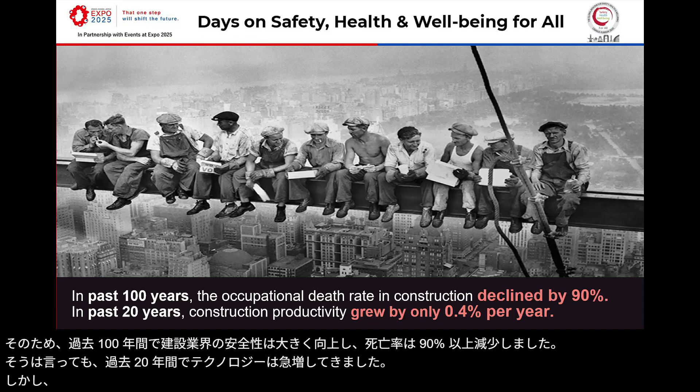Thank you, Ada. For those of you who are not familiar with Lenovo PCCW Solutions, we are the system integrator in this region, supporting many governments and enterprises in digital transformation. Here is the famous photo shot back in the 1930s, when the Rockefeller Center was built. In the past 100 years, there has been big improvement in safety, with the death rate of the construction industry reduced by more than 90%. Technology has been proliferating in the last 20 years. However, productivity only improved marginally, by 0.4%. So is technology a hype, or are we really in an era of change?

Here is the reality check. Compared to other industries, construction is behind in terms of IT spend. While the industry average is 4 to 6% of revenue going into IT, construction barely has 1%. Many of the works are still manual, 45%. In Asia Pacific, we are lagging behind our US and European counterparts. Statistically, if you compare the claims ratio, construction and engineering companies spend 3% on claims. So imagine the dollars spent. If you can improve productivity and the fatality and incident rate, that will reduce the outages of the industry and make it work much more effectively. So how can AI help? It helps with automation, project oversight, and quality oversight as well.

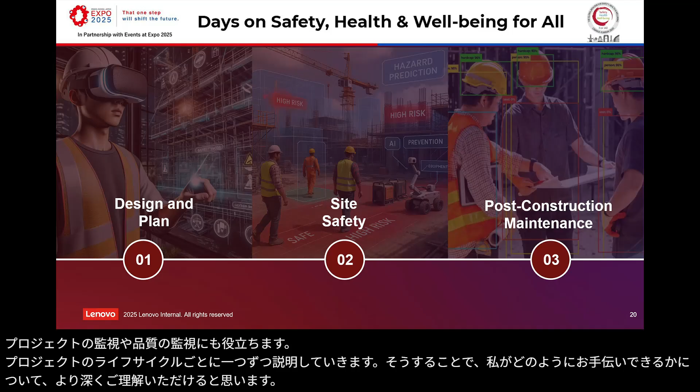So I will go one by one into the different life cycles of a project, and that will give you more perspective of how AI can help, from the design planning to the site safety and to the post-project. Construction and engineering is a very dangerous industry because it's time tight and resources tight by nature. And there are millions of parts moving around, and it's dynamic on a daily basis.

So when it comes to planning, that becomes crucial. In the past 10 years, we have had all those project management tools like P6. And nowadays with BIM and also the digital twin, we are able to do 3D modeling with resources control, supply chain, and labor resources planning as well. That helps us plan the project much more effectively and tune it according to the circumstances.

Virtual testing also comes into the picture. Prototyping is made much easier so that we can tune the design before it gets into the production stage. When it comes to training and learning, previously there were many complex contexts that didn't allow training to happen, or it was very contextual when it comes to incidents or disasters happening. Now it's all made available with VR and AR technology. With automation and robotics, many of the repetitive tasks at height, in tunnels, or in hazardous environments are all made possible today.

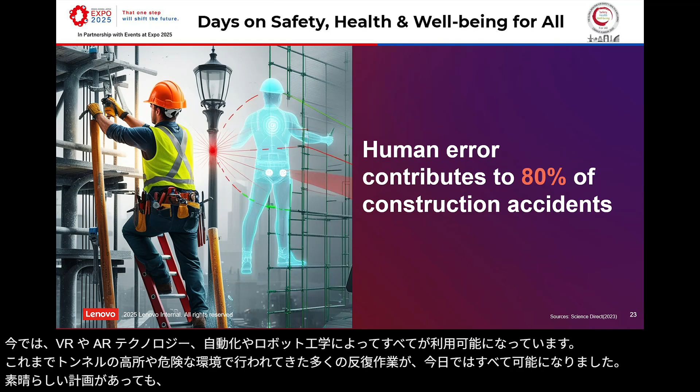So when you have an excellent plan, still, when it comes to execution, human error can cause 80% of the accidents. That is why control over the site is important. Drones nowadays allow us to do topography and landscaping checks to see where there are falling objects, flooding, water clogging, or dangerous slopes. They can also check where there are obstructions and blockages so that we can minimize the external environment harming our workers' safety.

Meanwhile, there are security measures that we have to blueprint and govern as well. When it comes to PPE control or access control, those can give you real-time monitoring, and can give you the permits and approvals only when they're deemed governed and followed through, so that you can check the security measures on site.

After construction is done and the project is executed, hardware failures, particularly unforeseen ones, cause another 30% of the incidents. So when it comes to post-project, with the help of technology, we have structural monitoring. With noise, frequency, or thermal infrared checking, we are able to tell when the hardware is near its breaking point, or we can do preventive maintenance before it gets into outages.

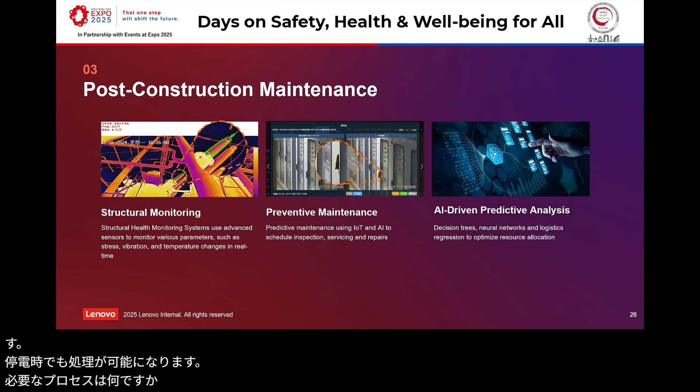So with AI, I think there's no doubt in this room that AI can help us improve the creativity and productivity of construction and production projects. However, AI is just a technology. The people around it are the most crucial because we own, are responsible for, and govern its successful implementation. And with AI technology coming much more into practice, skills also need to uptick. Data analytics, AI analytics, and operation of robotic equipment all require new skills. So even when the capital investment and internal staffing may not be ready, we have to take up the AI journey.

So you may count on some technology partners to help you in the process. We have helped power generation companies, car manufacturers, and water departments with many AI technology POCs, and some have even gone into the live stage already. So this is the major takeaway I wanted to share, and I'm sure the following speakers can give you the specific areas, context, and use cases.

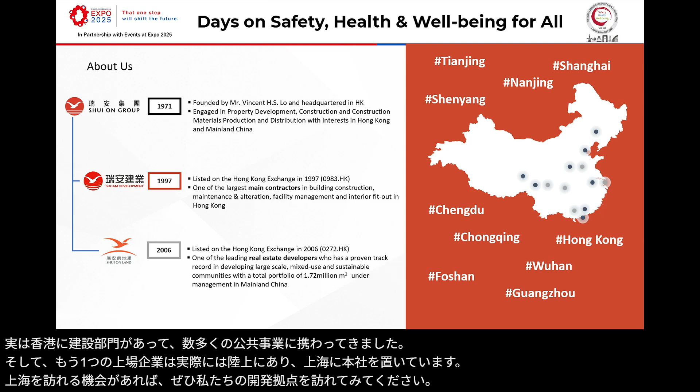Okay, so in short, I describe ourselves as a service provider, a one-stop service for buildings, from development, design and construction, interior fit-out, property management, maintenance and alteration, as well as asset management. And we also have our in-house digital solutions called Genesis.

Okay, let's get back to the sharing of today. I believe that right now the main contractors in Hong Kong are facing a lot of challenges. I think the key challenge we are facing now is the increased penalties. If there's any fatal or serious accident, you may risk immediate suspension from tendering, in particular for public works. That means a suspension for 6 months or even a year long. That means maybe billions of business opportunity will be forfeited.

The second one is stringent regulations, more stringent regulating actions against serious accidents for the contractors or those who are engaged in construction. High safety accountability. That means legal liability extends to all project levels, even professionals. Sometimes those engaged in project management may even face potential imprisonment.

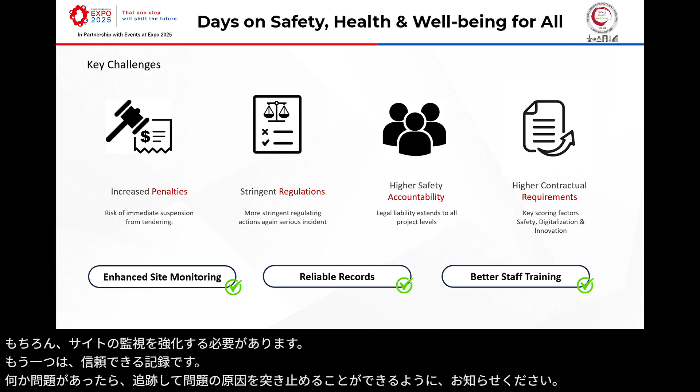So as a contractor, how can we cater to or manage these challenges? Of course, we have to enhance our site monitoring. The other thing is to have reliable records if anything goes wrong, so you can track and trace back the problem. And of course, better site staff training as well as workers training.

Right now, for any public works above 30 million contract sum, you have to use the 4S, what we call the smart site safety system. It's a kind of monitoring platform, and there are at least 9 functions, from plant and tools tracking, permit to work, AI safety monitoring, tower crane alert system, etc. Right now, I think a lot of sites are equipped with these 4S systems.

Some of the contractors will outsource it, but for ourselves, we are doing it by ourselves, from development to implementation. Of course, we are always subject to improvement and adjust all these different modules according to the project specifics.

And the other thing is that all this technology enables us to use the site camera. This is not only at the site level, but all the images can transmit to the head office. Actually, that's my office every day. If I'm in the office, I go and have a look at the major projects, and I can give instructions, or if I spot anything that is not according to the safety regulations or there's potential danger, I just send my message to the project manager on site immediately.

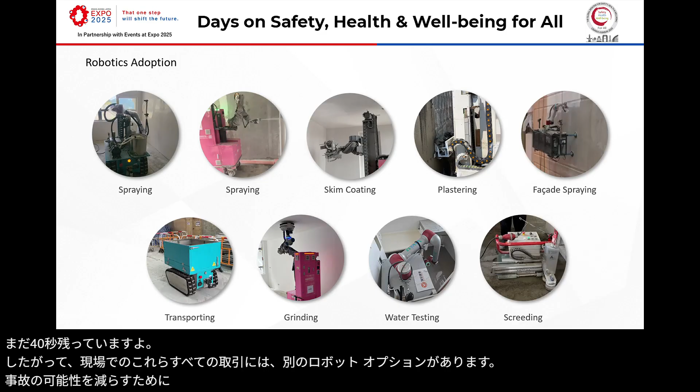So there's other robotic adoption for all these trades on site, to reduce the chance of having accidents from plastering, painting, and so on.

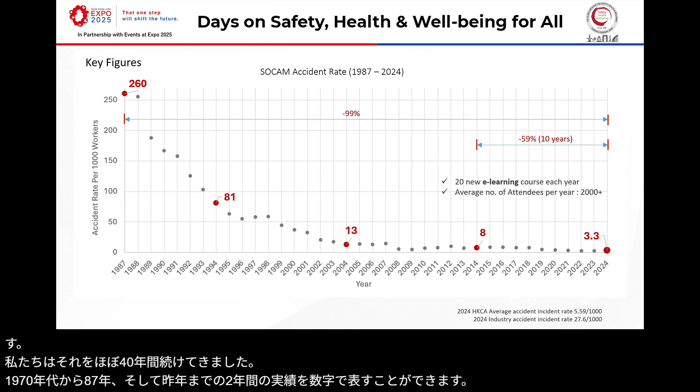I think the other important thing, apart from the technology, is the human side. The safety culture is also very important. We have been doing that for almost 4 decades. So you can see some figures on how we have performed from 1987 to last year, from 260 accidents per 1,000 workers to 3.3 last year.

So the last thing is that we believe that the cultural side is our total commitment from our chairman, the board, myself, and the senior management, as well as the site management. And also we have a lot of promotion activities to the workers, to the subcontractors, and even their families, to tell them how important site safety is, and that it will affect the whole family if they are not performing well.

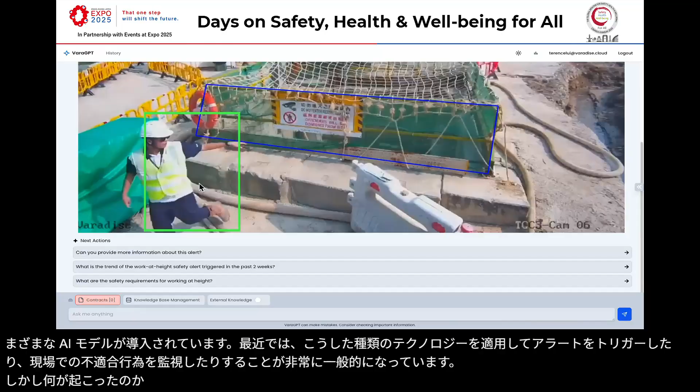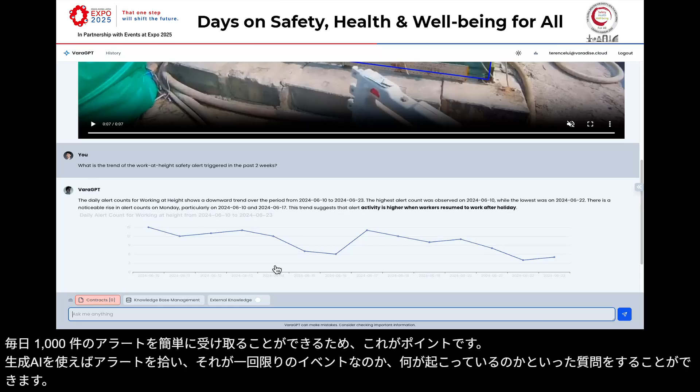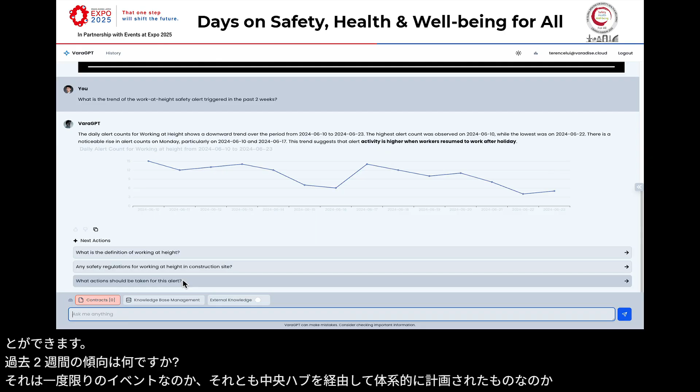So using generative AI, you can pick up an alert and start asking questions like, what is the trend for the last 2 weeks? Is it a once-off event, or is it a systematic flaw? It can go through your central hub and come up with insights. And then you can start asking questions like, if I'm new on site, what should I do with this alert? Who should I notify? Or what are the improvement works that we can do?

So Gen AI can actually go through your documents, your work done records, your method statements, etc., go through all the regulations and tell you what to do with reference. So you can see some of the capability Gen AI can bring with the help of a central hub.

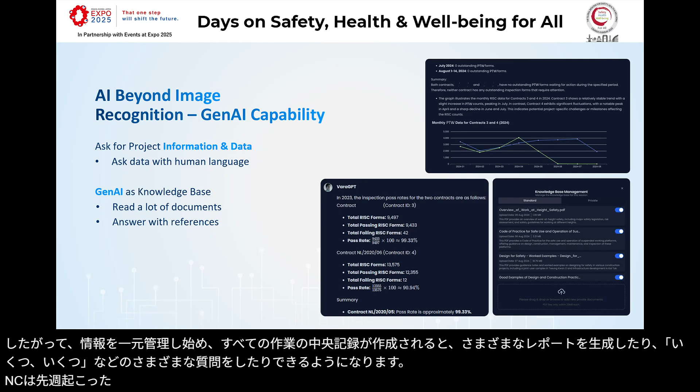So once you start centralizing information, once you have central records of all your work, you can generate different reports or ask different questions like how many NCs happened last week, which activities have the highest non-conformance rate. And that's the area you should be looking into. So you can ask questions like, what actions can be taken to reduce the number of non-compliances? Then it can tell you the highest category is this and that, and give you recommendations accordingly.

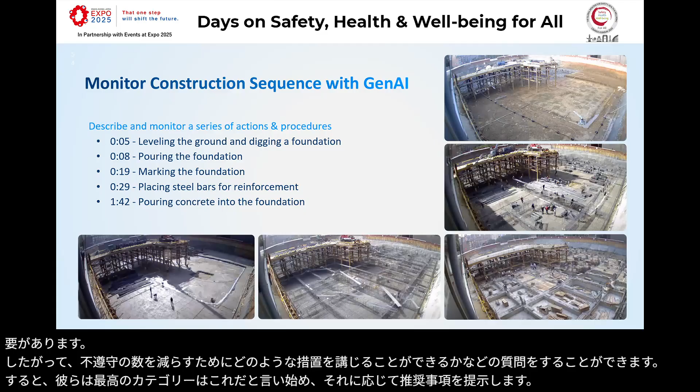So I believe with the help of digital twins or a central management hub and generative AI, we can now start to understand more about the construction project rather than just monitoring it. Instead of sending people monitoring things, you should start using generative AI to understand the context, understand the relationship, and catching non-conformance in your management systems.

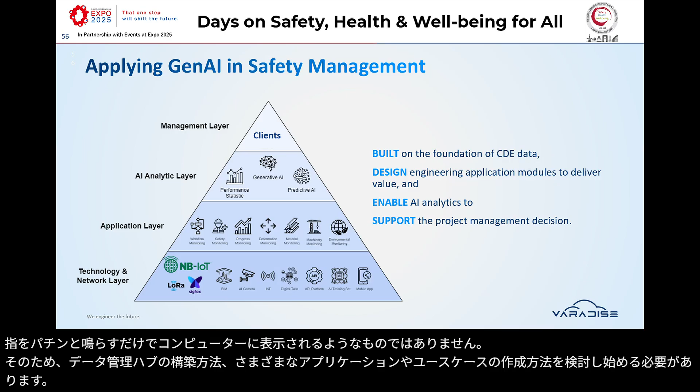But there are steps. It takes several steps to reach there. It's not something that you just snap your finger and then it will appear on your computer. So you should start thinking how to build your data management hub, how to create different applications and use cases, and then eventually build up your analytic layer to understand the data.

So I would recommend all of you to think about how to build your data foundations. What kind of data foundation do you need for construction? Because one special thing about construction is you need spatial data, you need BIM information, you need GIS information to understand what is happening at what location, instead of just a dashboard. So how do you build up your common data standards across all your projects for your organization, for your enterprise?

And the second thing is how do you modify your existing management system? How do you modify your standard workflow? Because one common problem we see is your digital solution is outside of your site team's daily operation. How do you merge it?

You have 30 seconds left.

How do you merge two things together and recreate more digitally oriented workflows? And eventually, once you have those in place, then you can start analyzing relationships and logic with generative AI. So at Varadise, we believe digitalization is like saving money. If we digitalize our industry bit by bit, we can create a better working environment for the future.

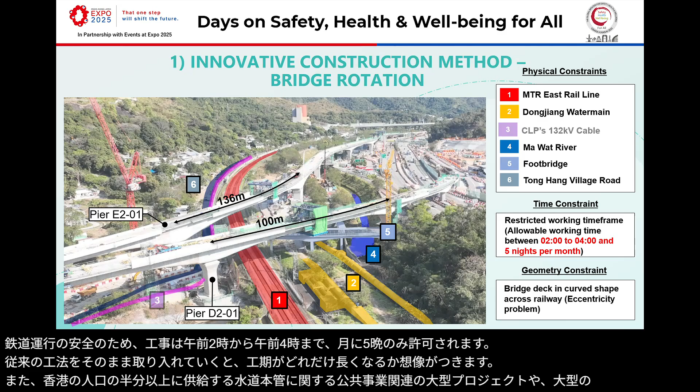To eliminate those hazards, the project team explored various construction methods globally. Finally, we identified an innovative solution of adopting the bridge rotation method. It is the first of its kind in Hong Kong. The principle of this method is quite simple. It's just to build the entire flyover section in a fabrication yard just nearby the railway track, and then rotate the whole completed section to the desired position in one night.

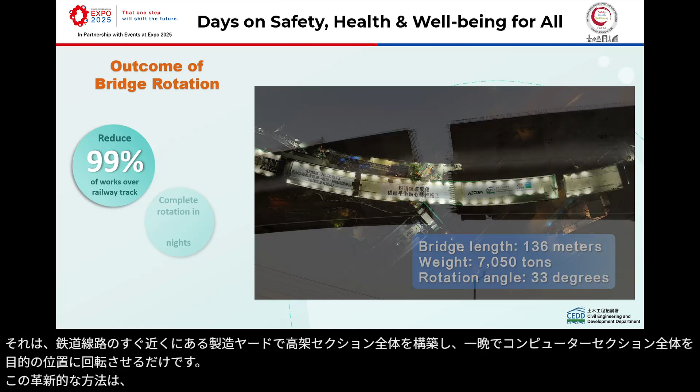The innovative method significantly reduced the major works over the railway track. It can also shorten the construction period from 100 nights to 2 nights.

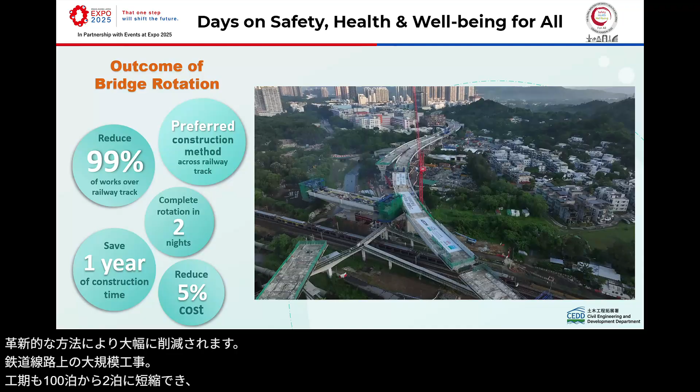And finally, the method has been adopted by the Railway Authority as a preferred option.

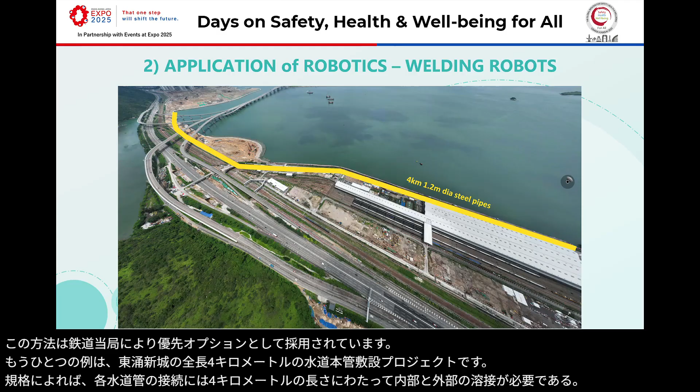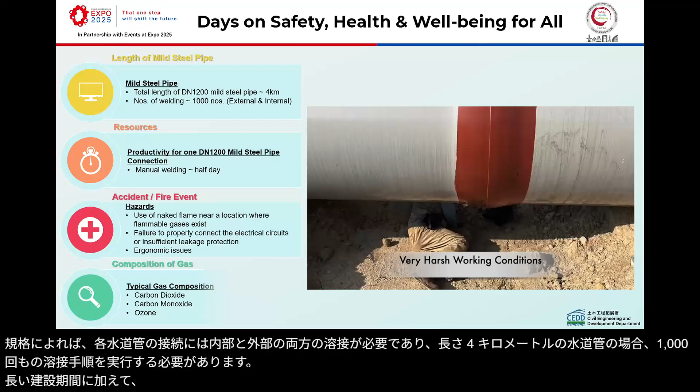Another example is the laying of a 4-kilometer-long water main project for the Tung Chung New Town. According to the standard, the connection of each water pipe requires both internal and external welding. For the 4 km long water pipe, we need to conduct 1,000 welding procedures. In addition to the lengthy construction period, you can imagine the hazardous working environment while workers carry out welding works inside a just 1.2 diameter water pipe, particularly during hot weather like today.

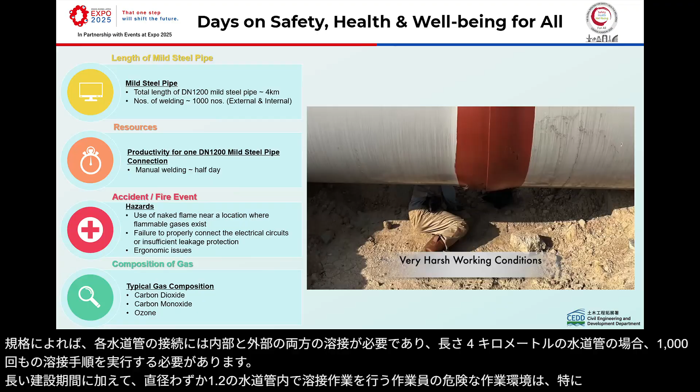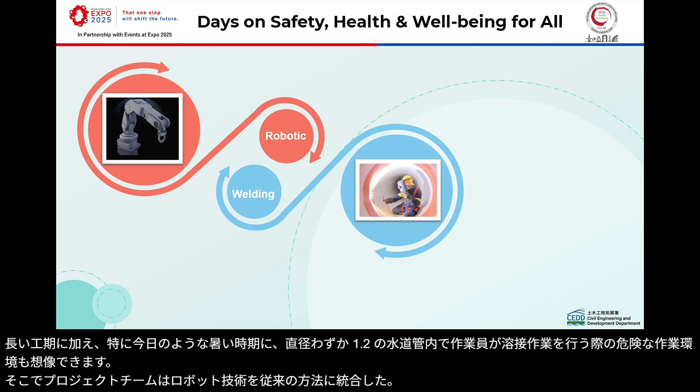The project team, therefore, integrated robotic technology into the traditional welding and invented a robotic steel pipe welding machine for the welding works. The worker can simply stand outside the water pipe to operate the machine safely. It not only eliminates most of the hazards, but also significantly reduces the construction time.

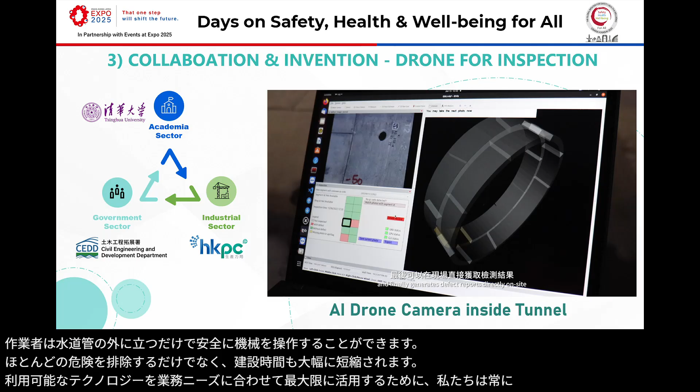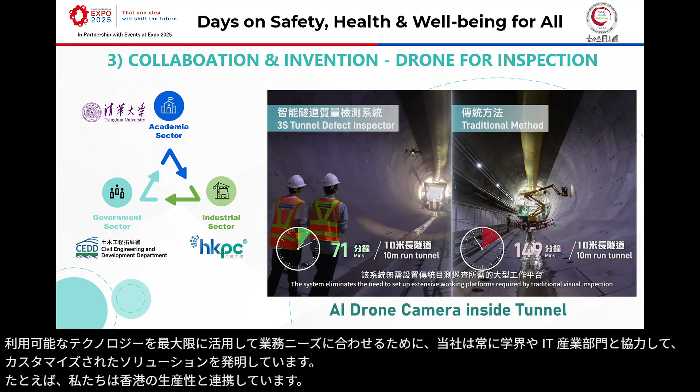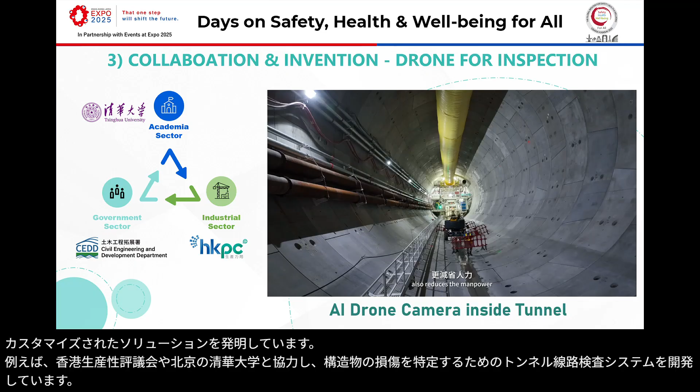To fully utilize the available technologies to suit our operational needs, we always collaborate with academia and IT industrial sectors to invent tailor-made solutions. For example, we collaborate with Hong Kong Productivity Council and the Tsinghua University in Beijing to develop a tunnel lining inspection system to identify structural defects by using drone technology. This inspection method can avoid workers working at height and significantly save time of inspection.

To further enhance the safety management efficiency, recently we have joined a pilot trial of adopting the Smart Eye technology. The technology is developed by our own government colleagues in the Development Bureau of the Hong Kong SAR government. It is a tailor-made solution for real-time and remote supervision of our works. It facilitates not only safety management, but also remote supervision for quality check and progress monitoring.

Jason, you have 30 seconds left.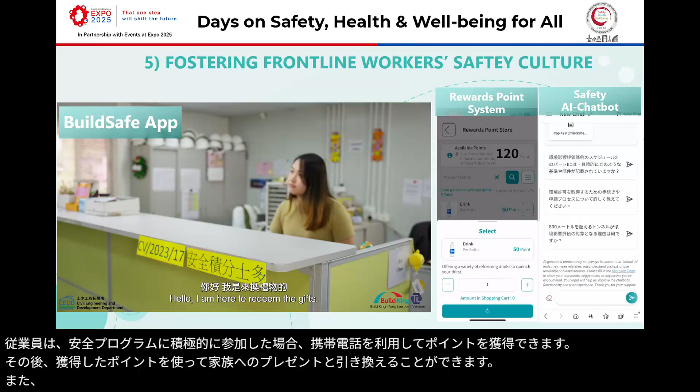Thank you. Nowadays, smartphones have been quite common in everyone's daily life. Riding on this advantage, we developed a workers' reward point system to encourage frontline workers' positive safety behavior and finally foster a safety culture. Workers can use their mobile phones to gain points if they have actively participated in safety programs. They can then use the reward points to redeem gifts for their family. They can also use the AI chatbot to answer safety queries and report safety concerns.

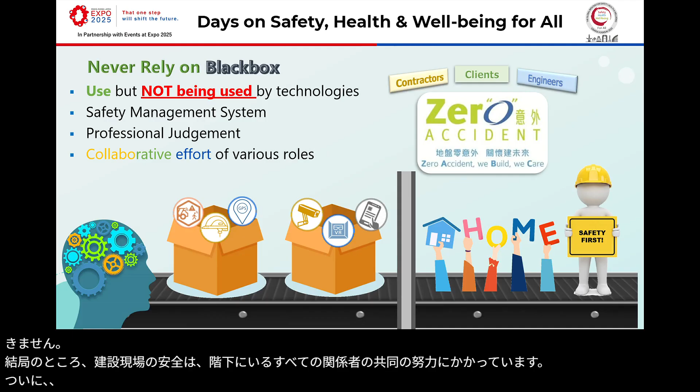While I have shared many of the innovative measures and advanced technology used in CDD projects, I would like to emphasize that we, engineers, shall never rely on the black box. They can never replace a good management system that is developed and run by us, and our professional judgment. Ultimately, the safety of our construction sites relies on the collaborative effort of all stakeholders. Finally, we believe that zero accident is an achievable target. I'm looking forward to working collaboratively with you all to protect the safety and well-being of our working pals.

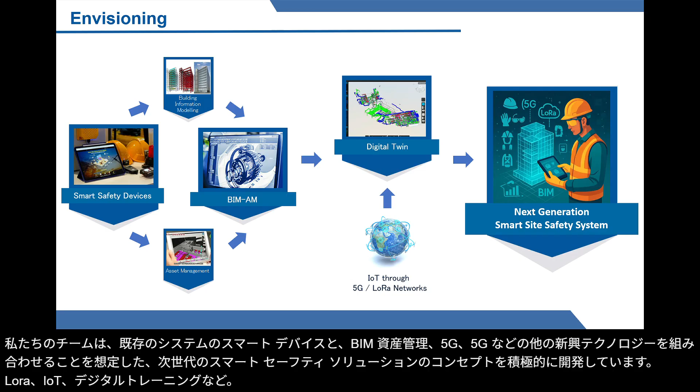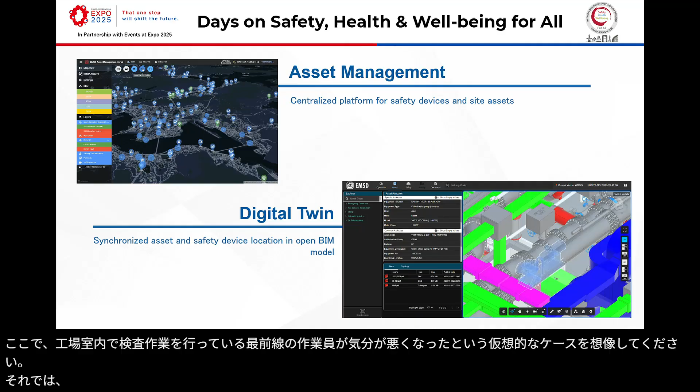In particular, by combining asset management technology, we can create one centralized platform for safety devices and site assets. Supervisors can see a map showing all our work sites across the city. And from there, they can drill down into a specific E&M plant or E&M equipment at a specific location. And with the digital twin technology, we can create a dynamic 3D replica of that specific site using BIM or open BIM models. And now imagine a hypothetical case of a frontline worker who feels unwell when conducting inspection work in a plant room. And let's see how the combination of these technologies can enhance the safety of our workers.

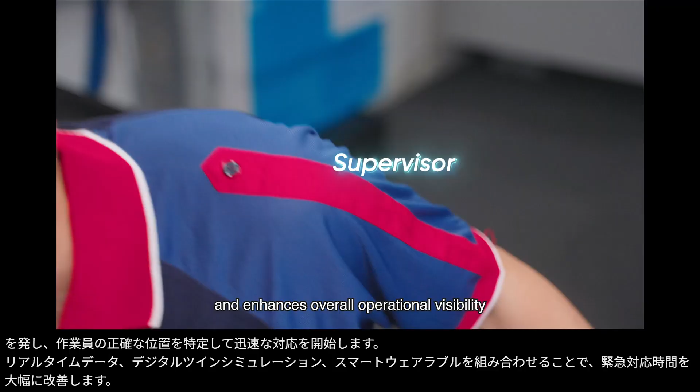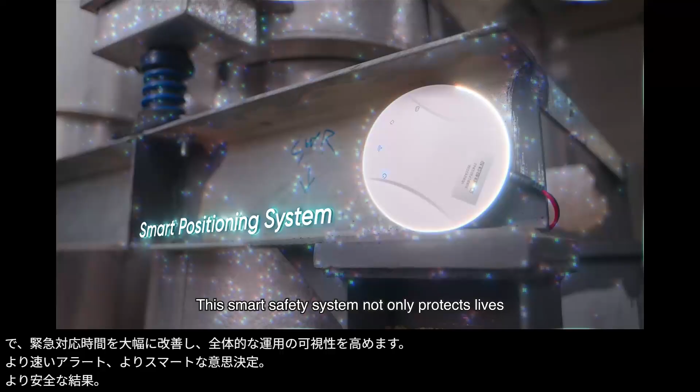The next generation smart safety solution has been built to enhance the safety and efficiency of fast-paced, high-risk environments. With just one SOS message from a smart device, the system instantly alerts the central monitoring platform, pinpointing the worker's exact location and triggering a rapid response. By combining real-time data, digital twin simulations, and smart wearables, the system greatly improves emergency response time and enhances overall operational visibility. Faster alerts, smarter decisions, safer outcomes. This smart safety system not only protects lives, it supports a safer, smarter, and more resilient workforce for the cities of tomorrow.

The next generation smart safety solution is actually our commitment to enhancing the safety of our workers. And for this solution to work to the fullest, keeping humans, our workers, in the loop is the key. So we will be actively working with our workers, supervisors, and also industrial partners and the trade. And it is only when we work together to fully apply this latest technology in our daily operational routines can we truly achieve the ultimate goal of zero accidents in the construction industry and especially in the facility management industry.

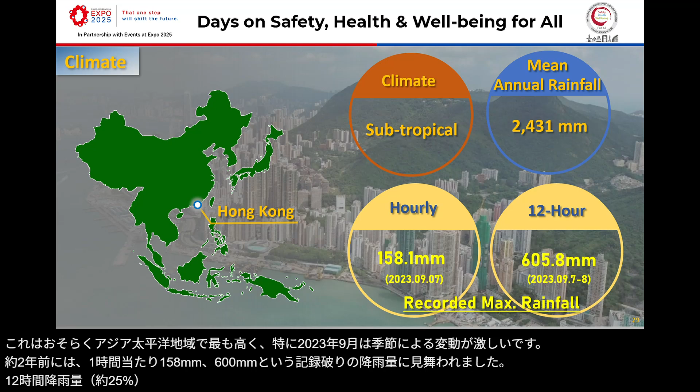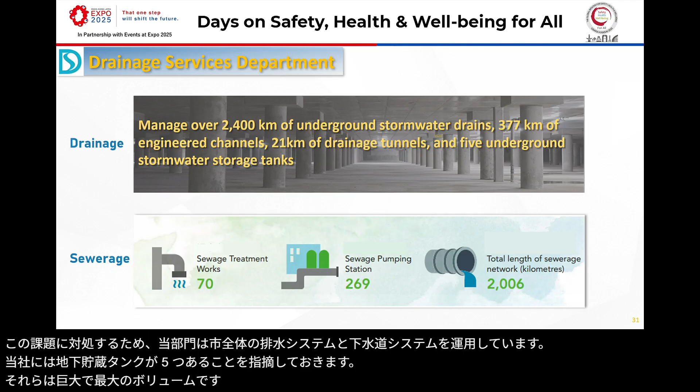Over the past years, we have made efforts to enhance our drainage and sewerage infrastructures. While operational efficiency is essential, workers' safety remains of paramount importance. Adoption of robotic technology has been instrumental in achieving this balance. Next, I would like to bring you a short video of Hong Kong to see the Hong Kong landscape. After that, my colleague, Candy, will give more detail on our technological solutions.

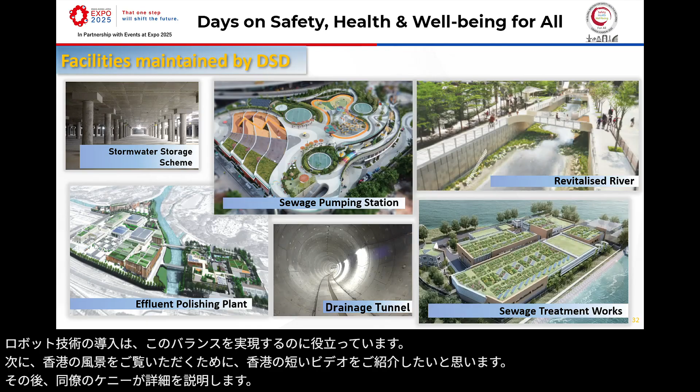Hong Kong is a vibrant cosmopolitan city at the southeastern tip of China. With an area of 1,115 square kilometers, the city is made up of Hong Kong Island, Kowloon Peninsula, and the New Territories. Between Hong Kong Island and the Kowloon Peninsula lies Victoria Harbour, one of the world's most renowned deep-water harbors. Strategically located at the heart of Asia, Hong Kong has built a reputation as a regional business hub, a natural gateway bridging east and west, and the home of more than 7.5 million people.

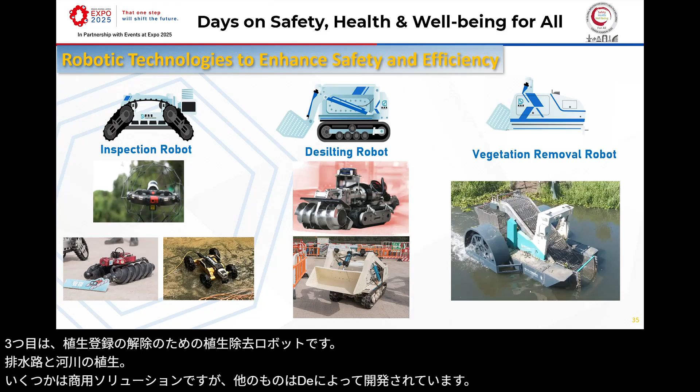This slide shows the range of robots that our department deployed to enhance safety as well as operational efficiency at our works. There are quite many of them. We utilize robots in different areas, and I will talk about 3 of them today. First is the inspection robot, such as drones and remotely operated vehicles, so-called ROV. We use it in the air, water, and on the land. Second is the desilting robot that we use for maintenance of our drainage channels and box culverts. Third is the vegetation removal robot for clearance of vegetation in drainage channels and rivers. While some of them are commercial solutions, others are developed by DSD and our working partners for specialized applications.

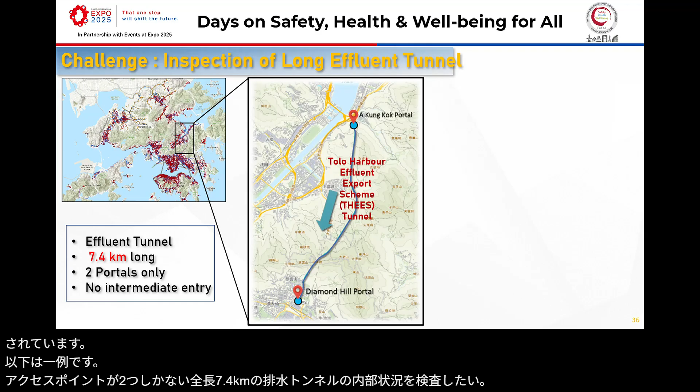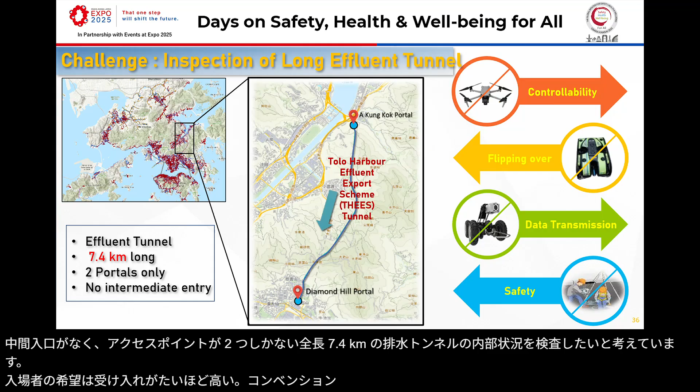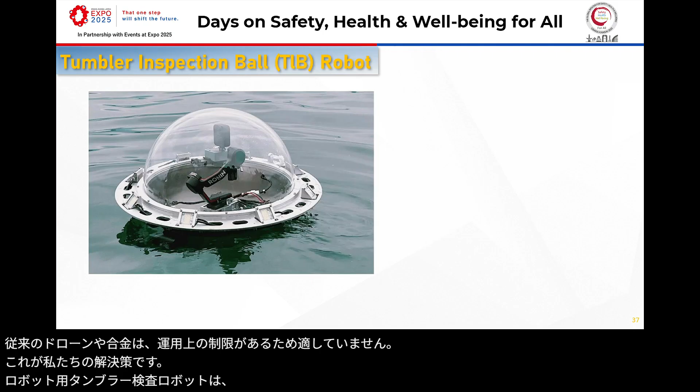Here is one of the examples. We want to inspect the internal condition of a 7.4 kilometer long effluent tunnel, which only has 2 access points with no intermediate entry. The risk to man entry is unacceptably high. Conventional drones and ROVs are unsuitable due to their operational limitations. This is our solution: the tumbler inspection robot, a ball robot, which consists of an aluminum alloy lower casing and a transparent acrylic upper hemisphere. Inside is a 360-degree orthogonal camera system with AI stabilization functions.

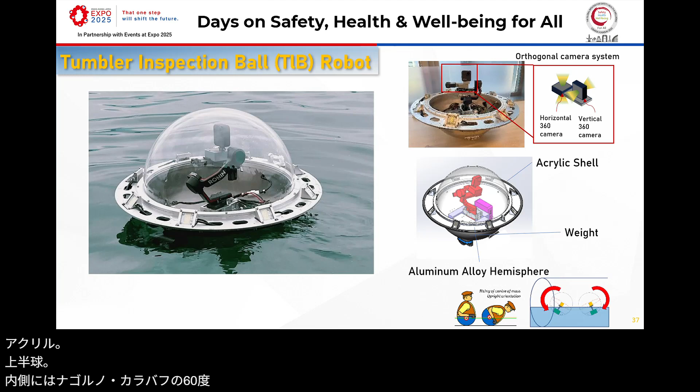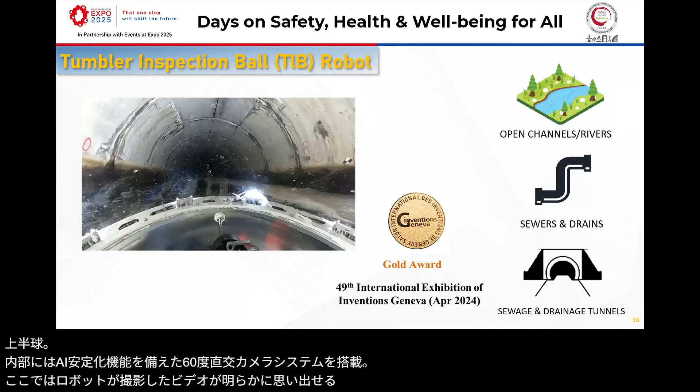Here you can see the video taken by the robot. It clearly records the internal condition of the effluent tunnel. This invention earned the Gold Award at the International Exhibition of Inventions in Geneva in 2024.

Talking about confined space. Confined spaces such as stormwater storage tanks and sludge holding tanks could involve the risk of poisonous gas, oxygen deficiency, sudden increase of water level, excessive heat, and so on. Rigorous safety measures and large crews of site personnel are required to safeguard the men entering the confined space.

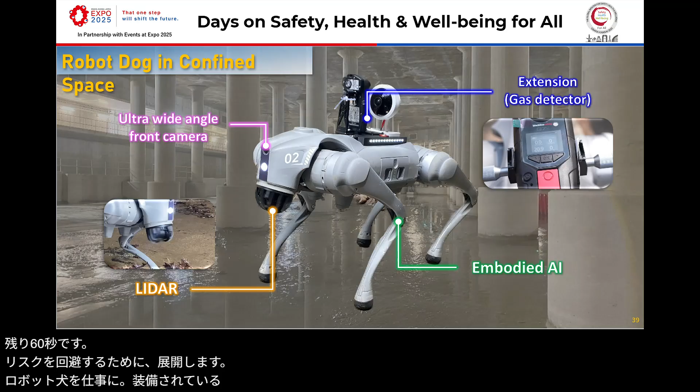To avoid the risk, we deploy a robot dog to the job. It is equipped with an ultra-wide angle camera, LiDAR, a gas detector, and also embodied AI.

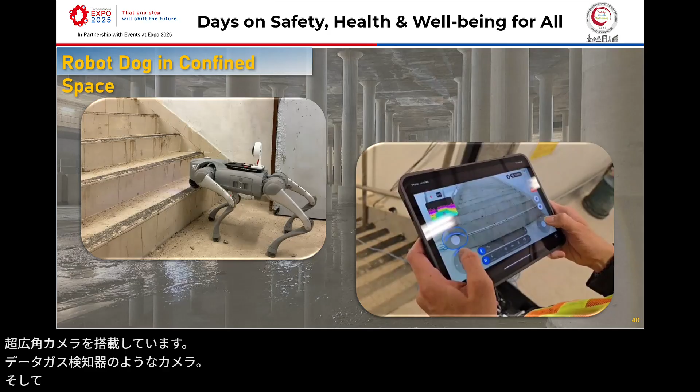You see, it can navigate between uneven terrain and staircases to survey the internal conditions of the confined space. It can cut a lot of the resources that we have to use in normal man-entry confined space work. We also develop a wide range of desilting robots to carry out desilting work for channels in different environments such as shallow water, deep water, and also inside drainage and culverts.

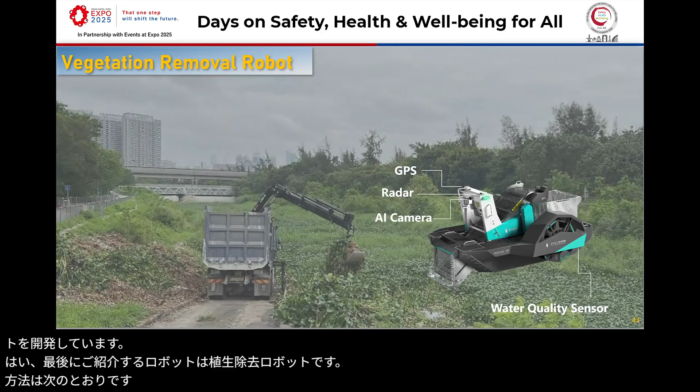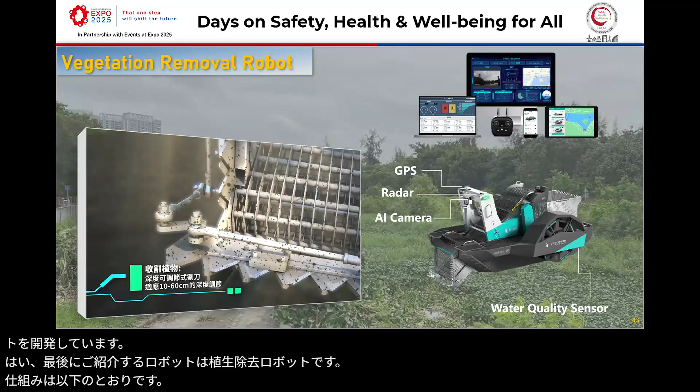Here is the last robot that I will talk about. It is the vegetation removal robot. Here is how it works. Okay, looking to the future, further advancement will be on full automation with AI-powered learning, real-time monitoring networks, data-driven decision systems, and enhanced remote control operation.

Finally, I hope that with the assistance of innovative robotic technology, we can work smarter and also work safer.

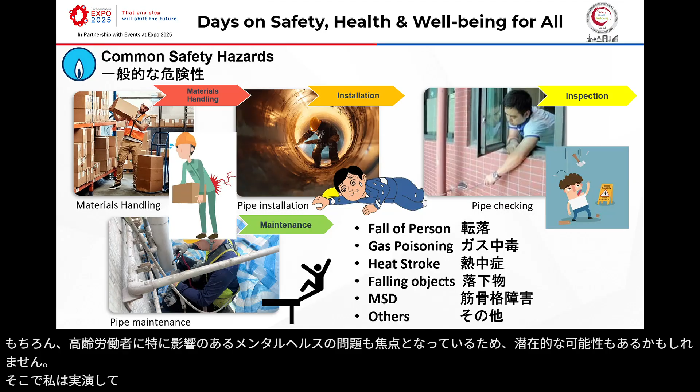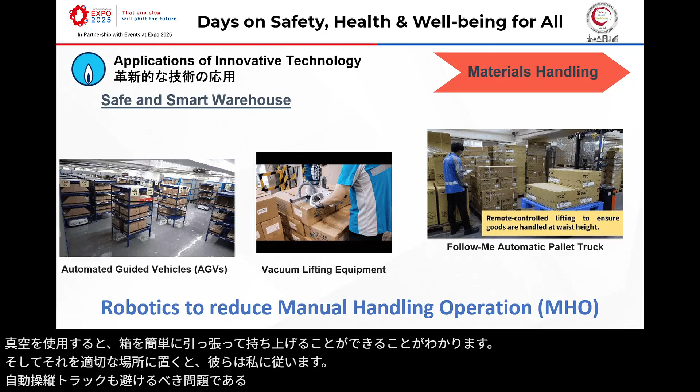And inside the store, there are many manual handling hazards causing MSD. So we have the vacuum lifting equipment. We developed this equipment based on the NIOSH lifting equation to reduce the vertical distance and the horizontal distance of the handling. Using the vacuum, you can see that the box can be easily pulled, lifted, and put in the appropriate location. And the follow-me automatic pallet truck is used to avoid collisions and crowded situations inside the store. After the handling of materials, we start to install the pipeline.

For the underground pipeline, sometimes our workers are required to work inside the pipeline for the welding, the cleaning, and the anti-corrosion, anti-rusting works. So it will be a very confined space, and the heat stress issues and ergonomic issues will be addressed.

So we invented a robot. You can see that the grinding and the coating operation can be automatically operated by the robot. It is flexible because the diameter is flexible. We can enter a wider pipeline or smaller pipeline. And this is also sustainable because with this technology, we can reduce the chance of entering the pipe again, and the maintenance requirement will be reduced.

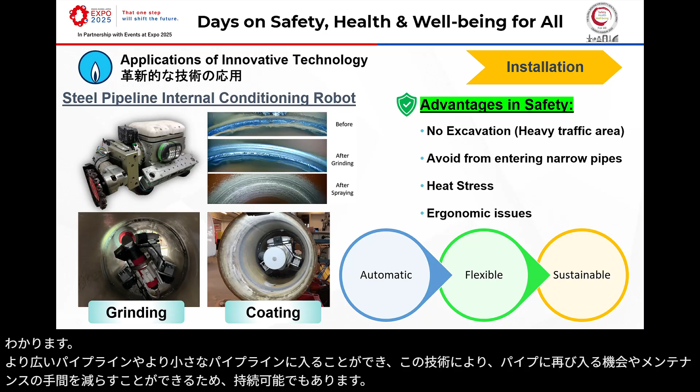And for the inspection of the underground pipeline, we'll use intelligent pigging to check the pipeline situation with the camera and the intelligent data from the pigging. For the risers, the pipelines installed along the wall of high-rise buildings in Hong Kong, we will use this camera with optical zoom equipment, also the methane gun, so you can see that we don't require working at height or entering your premises to check the pipelines.

We simply place the camera and the equipment outdoors, and then it will automatically adjust the angle, and all the photos and videos will be recorded. And there is an AI logic behind. So after the video is input into the computer, we use the AI to calculate which levels the risers belong to. So we can know in advance the health condition of the pipeline.

If the pipeline is required to undergo maintenance, we have a robot, an injecting robot. We are not required to work at height or on the scaffold to replace the pipeline. The robot automatically rises to the appropriate location and then fixes the pipe. And then we apply a jacket to the pipeline and inject the insulating materials into the pipeline to avoid further gas leakage.

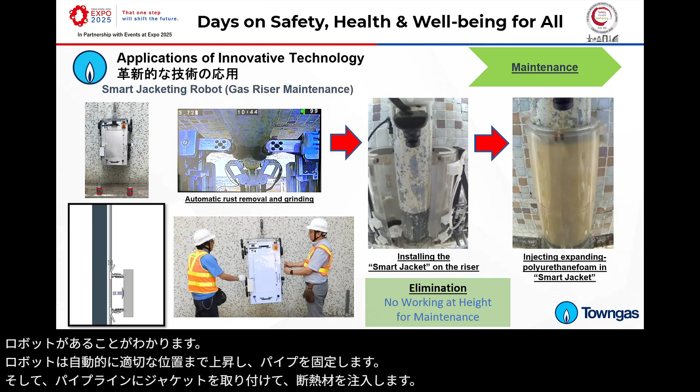Patrick, you have 40 seconds left.

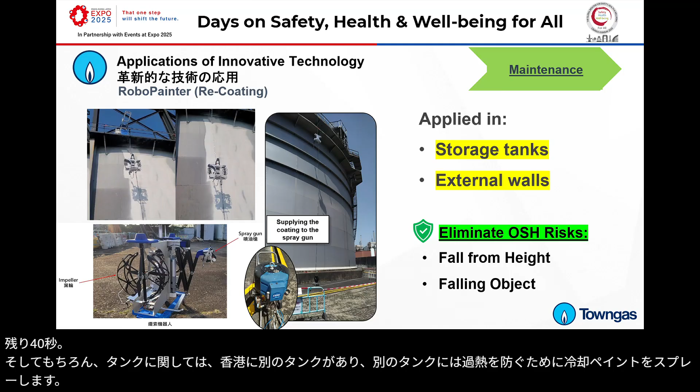And of course, for the tanks, we have different tanks in Hong Kong. We'll spray cooling paint to avoid overheating. So we also apply robots to do so, to avoid fall from height and falling object hazards.

And finally, all these AI and robotics are human-centric, human-centered, and we aim to use technology and AI to improve workplace safety. And we aim to use the technology to empower our colleagues, especially the aging population. Our experienced colleagues can provide their experience to the robotics and teach the robots how to work. And our youngsters are more interested in operating the robots. So we try to create a coexistence and collaboration area for all people to work with technology and AI to improve the health and safety of the company.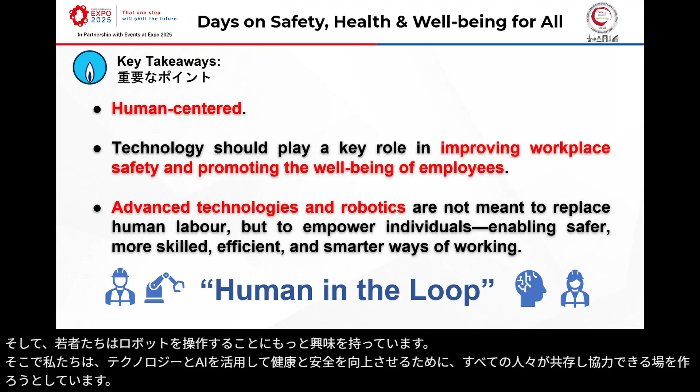Thank you, Patrick. Human in the loop is very important. So with advanced robotics, next may I introduce speaker Mr. Ray Wu from the Hong Kong Electric Company to share with us enhancing safety and health through innovative technology applications.

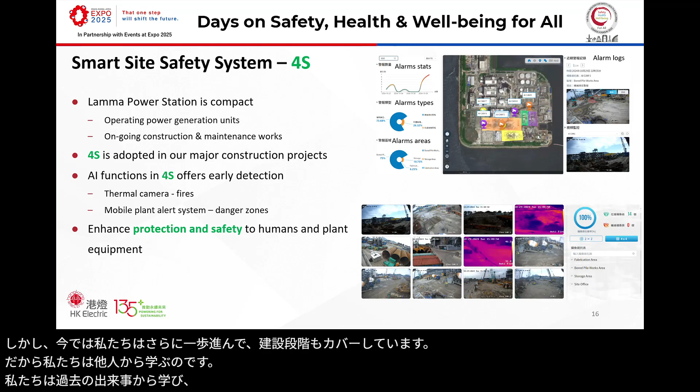So as a lot of our colleagues before have already introduced the use of a smart site safety system, I'm not going to go into details here, but we believe that we already have a lot of technology-driven and technology-assisted applications to help us maintain a high standard of safety in operations and maintenance. But now we take a further step and we cover our construction phase as well. So we learn from others, we learn from past incidents, and we try to collaborate with service providers to mitigate construction risks at site.

So the next one is our use of robotics. Similar to what our Drainage Services Department has applied, we also have power supply cables built inside dedicated cable tunnels spanning kilometers long. So we use robotics to monitor the cable tunnel conditions. The machines are capable of visual inspection, heat detection, and gas detection. This kind of inspection has dramatically reduced the frequency of required human work inside a confined space.

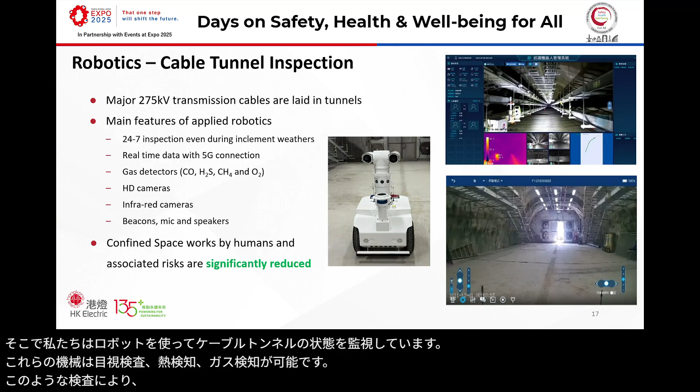On the other hand, instant translation is so common nowadays, and even in today's event, we have instant Japanese to English translation. So we are also keeping the same pace. We adopt an AI translation program in our daily construction activities. Our safety messages, safety briefings and trainings can be translated into a variety of ethnic groups' languages to promote health and safety. So we make sure that nobody is missed and left behind.

We also develop our own AI model for the analysis of the healthiness of our electrical equipment. By the use of AI fed with operation and inspection data, instead of blindly checking thousands and thousands of power cables, we can optimize our maintenance strategy based on a risk-based approach assisted by AI. This significantly helps reduce unexpected system downtimes and also potential physical damage and safety hazards to our colleagues and the people around.

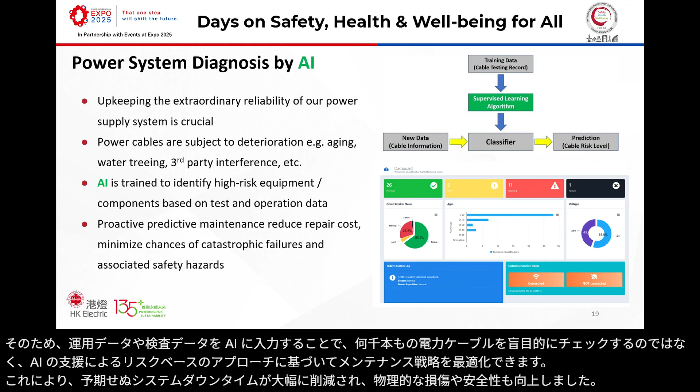Lastly, we have also adopted and built a virtual reality training center dedicated to our own operations. This is a VR immersive experience to allow our frontline operators to practice critical operation scenarios. Various kinds of emergency situations can be simulated in this VR environment so as to equip our staff to handle real-life urgent cases and unlikely emergency scenarios whenever the need arises.

So to summarize, the pursuit of excellence is our core value. It's safety, health, and well-being for all. At Hong Kong Electric, we pursue excellence by applying human-centered innovation to create a safer, smarter and healthier tomorrow. So let's join hands together, empower each other with new technologies and enhance health and safety through innovation.

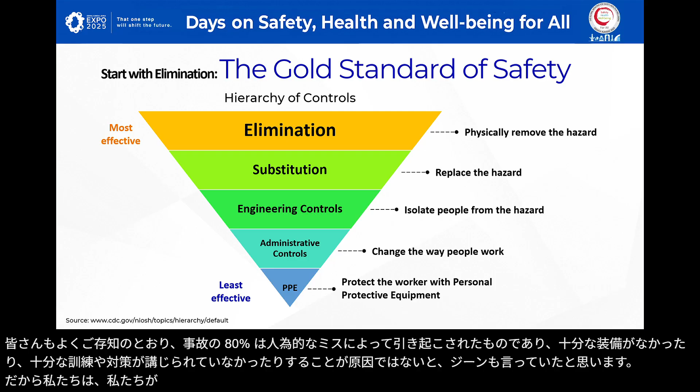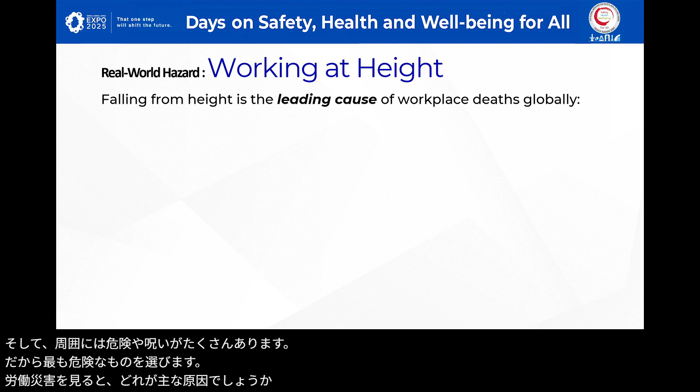There are so many dangers and hazards around, so we picked the most dangerous one. If you look at industrial accidents, which one is the leading cause of fatalities? It is working at height. In China, it accounts for 32%. In the USA, 38%. Japan, 40%. Unfortunately, it's worse in Hong Kong. It accounts for 45%. So there's no better place for us to develop a robot that can eliminate the risk of working at height, as Hong Kong also has the most skyscrapers in the world as a city, right?

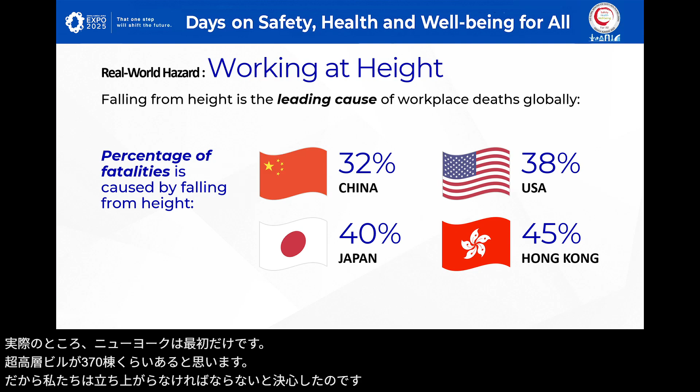We have 567 skyscrapers taller than 150 meters in Hong Kong. The second one is Shenzhen, with about 444 buildings. In fact, New York only comes third, with about 370 skyscrapers. That's why we are determined to come up with a solution that can eliminate the risk of working at height.

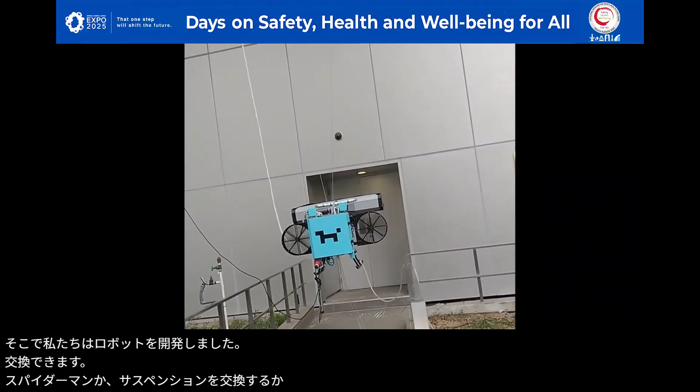So what we do is, we develop a robot that can replace the Spider-Man or the suspended gondola, so no human is required to work at height at all. Our concept is we create a robot similar to a human, put it out there, and it has an arm that can carry different tools. If it carries a cleaning brush, it can clean the windows or the exterior wall. If it carries a detection device, it can perform detection or inspection on the surface of tall buildings.

So as you can tell, it's a multifunctional robot. As long as you put it out there, it cleans windows, it cleans exterior walls for you, and it can also do inspection to find out any potential risk, any hollowing or spalling, or any tiles coming loose. So we can also do preventive maintenance that will keep away the potential risks.

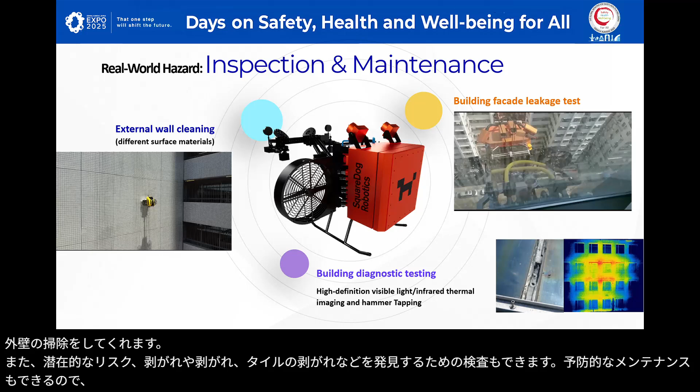So by doing that, I think there's a ripple effect. By protecting the workers, we also protect the building owners from potential loss. And of course, it's bad feng shui if something happened to your building, right? The asset value will also deteriorate. And we also protect the pedestrians, so they're free from the risk of somebody falling on top of you, okay? And it also protects and helps the city, the government, and the business owner by eliminating the liability.

Okay? It's okay, I'm going to my last slide, even though it doesn't move. So in short, we believe using robots we can take away the most dangerous tasks from humans, and the nature of human work can be greatly enhanced.

Thank you, Antonio, for the excellent sharing and also economical use of time to catch up. I don't want to have a massive overrun, but we still have a bit of closing to do. So I'll go to the platform now. Knowing that we have a very full session with so many speakers and so many excellent presentations in 70 minutes, I'm going to give a very quick overview and summary.

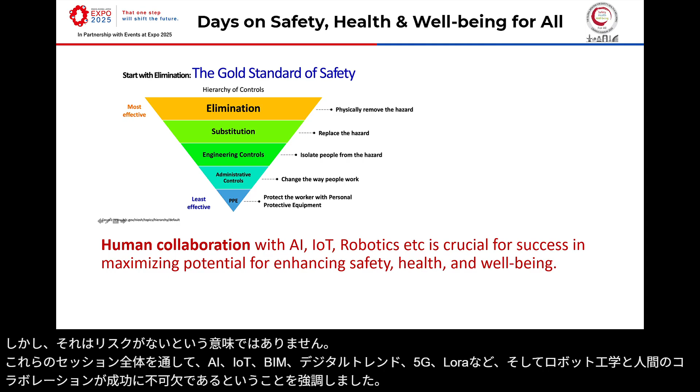Second last slide. Yeah, in the last presentations, we had a lot of discussions about safety systems, solutions, and how enterprises apply them. So you can see that technology has been in the system for some time already. And with the hierarchy of controls, we understand that technology can help us, hopefully, to eliminate or substitute the risk. But that doesn't mean there'll be no risk. So what runs throughout all these sessions is that human collaboration with AI, IoT, BIM, digital twins, 5G, LoRa, etc., and robotics is crucial for success in maximizing potential for enhancing safety, health, and well-being.

That brings us to the key takeaways. We know we haven't got time for the panel discussion, so we've done it beforehand. The key theme is how to ensure human in the loop applied to all these technologies and systems. These are the key takeaways from all our speakers. Starting with Jeanie, human-AI collaboration is crucial for maximizing AI's potential, demanding the workforce adapt and upskill. From Freddie, total commitment and cultural change with your entire value chain, from workforce to suppliers. And from Terence, AI empowers people by handling the routine so experts can lead with strategic decisions.

And Jason: never rely on a black box. Professional judgment is very important, and a safety management system is also crucial. So the ecosystem is very important to all these. And Eric: only when we work together in fully applying the latest technology in our daily routines can we truly achieve the ultimate goal of zero accidents in our construction industry. And from Ben, DSD, applying innovative robotic technology in public works, which has successfully elevated the efficiency and, most important of all, the occupational safety and health for personnel involved in the undertakings.

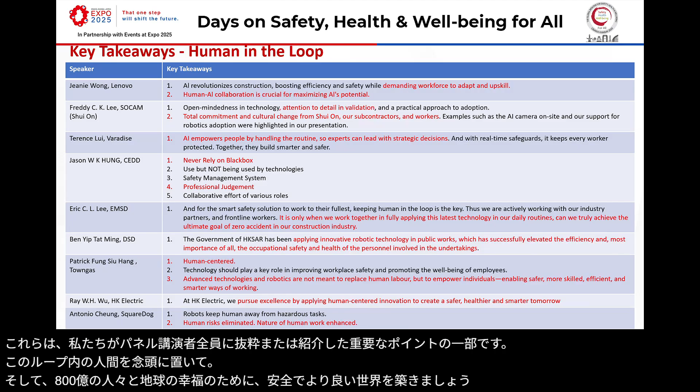And from Patrick, human-centered advanced technologies and robotics are not meant to replace human labor, but to empower individuals, enabling safer, more skilled, efficient, and smarter ways of working. From Ray, pursue excellence by applying human-centered innovation to create a safe, healthier, and smart tomorrow. From Antonio, human risks eliminated, nature of human work enhanced. These are the key takeaways we have extracted from all our panel speakers with human in the loop in mind. Let's build a better world for the well-being of our 8 billion people on planet Earth with safe, healthy, smart, sustainable ways of living and working. Thank you.

I've overrun by only 4 minutes, so that's also a marvelous achievement. Thank you very much.